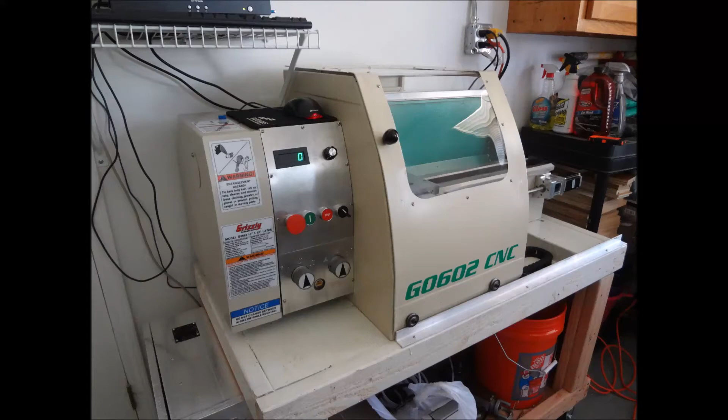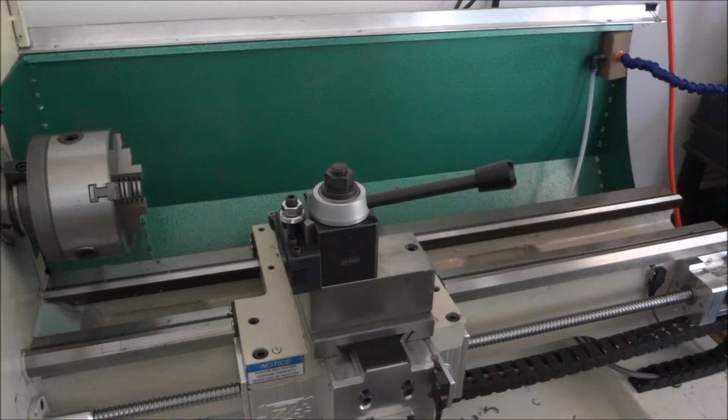Alright, so the next project I'd like to do for the G0602, after working with the quick change tool post, I decided that this handle's got to go. It doesn't feel good, it's got sharp edges, and it's plastic. So I thought, what better project to have for one of your first turnings on the G0602 CNC, but a nice knob for my quick change tool post. So let's go to Fusion 360 and draw this up.

Well, here we are in Fusion 360, and so I thought I would just kind of go over some of the features that it has. Let's just do the drawing for the quick change tool post knob. There are several ways that you can draw this out. You can use a sketch to create a circle like so. We want to use this plane here because this is my Z, the blue line, and this red line is my X. Right here, the spindle and the chuck, and over here would be the tailstock.

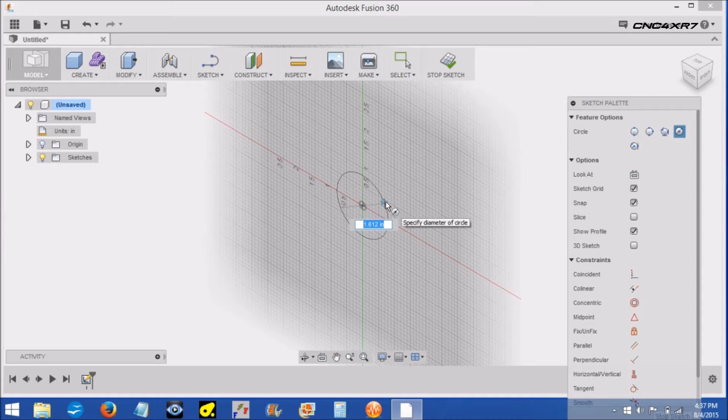So you start here and you can just click in the center, and our stock is 1.5 inches. So you type in 1.5, hit enter. It locks it in. Click the mouse and you're done. So we have our sketch of our circle. That's one way to do it. And then we can go to modify and we can pull this out 1.5 inches. Hit enter, and now we have our cylinder. Pretty straightforward.

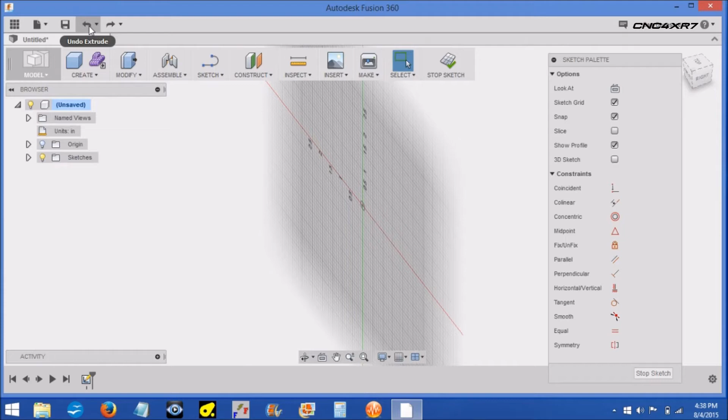Or undo this. Go back to the beginning. Another way is to go to create cylinder. Again, the blue line is our Z, and this plane right here being the spindle. Want to click on that. Type in 1.5 inches. Hit enter. Click the mouse. And then up here in this dialog box, I want to type in for the height 1.5. Hit enter, and I have a cylinder.

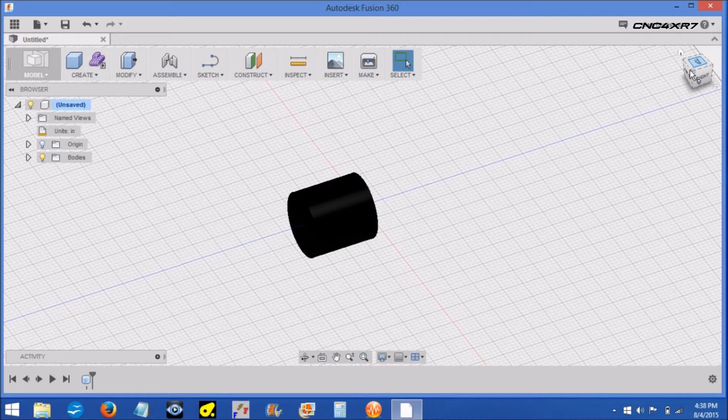I apologize for my display. For some reason my graphics card in this computer seems to have issues with 360, and it's very, very difficult to see. I can click on it and it turns it blue right here, but anytime I do anything, it changes it.

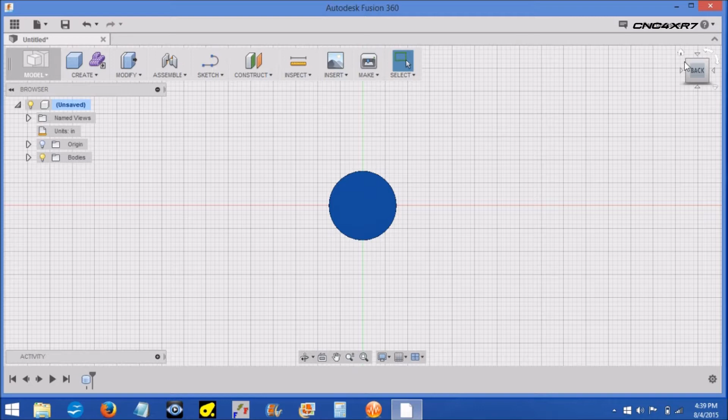So now one thing I want to point out is this little rotational cube up here. This thing is awesome. I'm used to using SketchUp, and this is a lot easier to manipulate your model and see where you're at. You can grab the center here and move it. You can just click on the center and it will give you the back of the model. You have these corners you can grab and rotate, and you have this home button which gives you an isometric view. Very, very cool feature. So this is the spindle side right here, which would be the back. So I'm going to click on that.

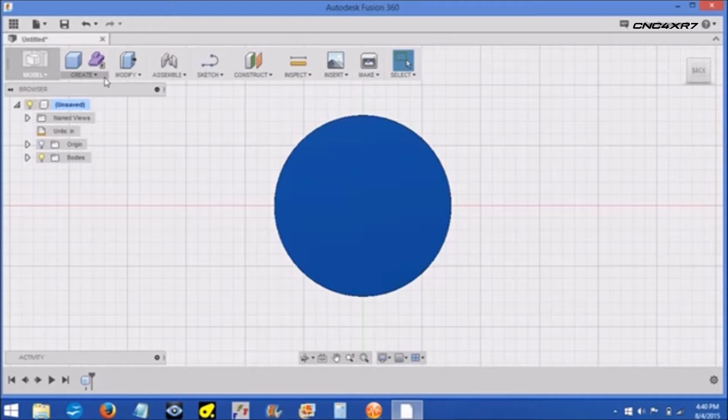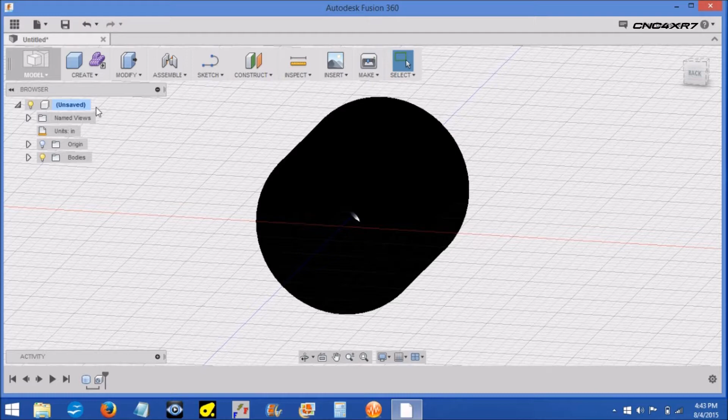Okay, so next we want to put our hole for our shaft to go into. So you go up to create hole, click on this point right there in the center. And we want it to be 0.875 deep. And we want it to be 0.3425 in diameter. And so we have a hole. Let me rotate it around so you can see the hole going through there.

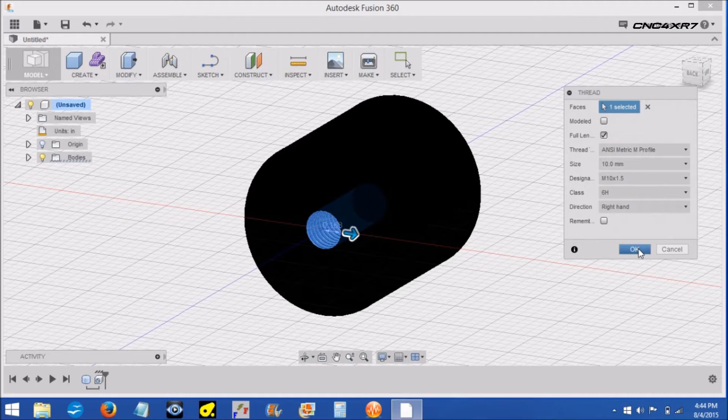Next we want to create some thread. So you click on thread. And we want to put it right here on this face. We want to use metric M profile thread. It automatically puts in a diameter based upon the diameter that your hole is. We want M10 by 1.5. Right hand threads. Click OK, and you can see we have our threads.

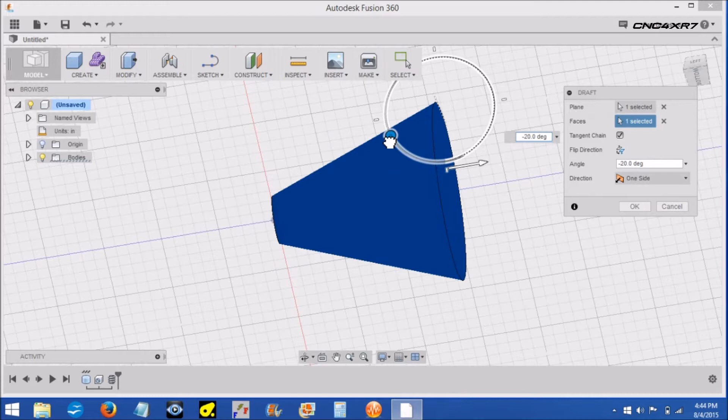Next we want to go to the front here, and we want to go to modify, draft. We want to select this plane and this face. And you can see it gives you a little thing here where you can move a knob to adjust. Let's see what 20 looks like. Okay, it might be a little too much. Let's go 15. You can move your manipulator, or you can just type it in. Negative 15 degrees. Select OK, and we have our taper. And then you want to go to modify, fillet, and we'll select this edge here to fillet.

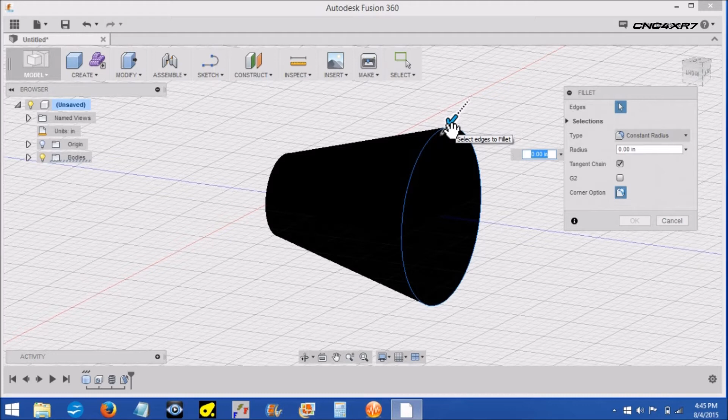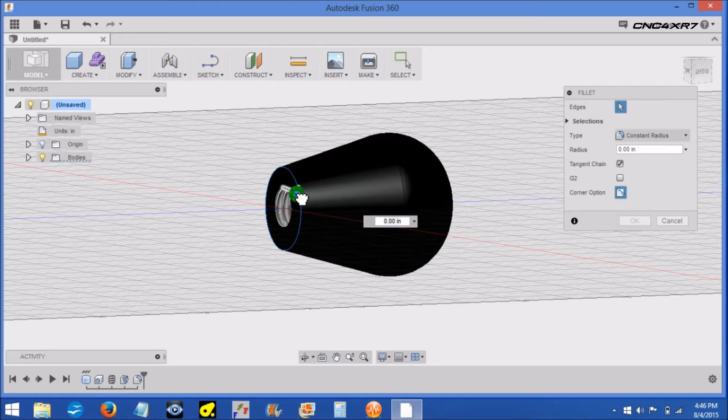And we want to go a ½ inch, so we can move our arrow down 0.5 like so. Click OK. Now we have it knobbed, and we want to do a little on the front edge as well. So you can go back up to modify and select it, or you can just right click and it says repeat fillet. It gives you the last thing you did. You can repeat it on this angle edge right here, and let's just do say 0.10 thousandths here, and there is a knob. Pretty straightforward and simple.

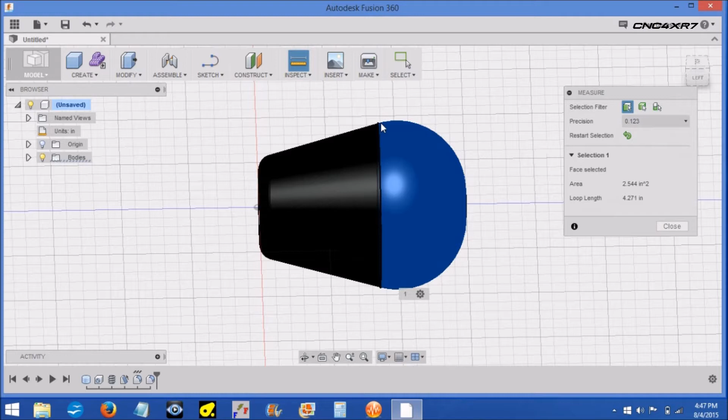Here's our chuck here, and this will be our knob. That's pretty much it. Now if you want to measure and see what the overall diameter is going to be, you can go to inspect, measure, and we can click on this right here, and it gives us, well, it's giving us the area. We don't really have a line here. Let's click here, here. Let's see if it gives us the diameter. Okay, 1.163 right here. So it's a little bit bigger here, maybe 1.25 inches. That's good.

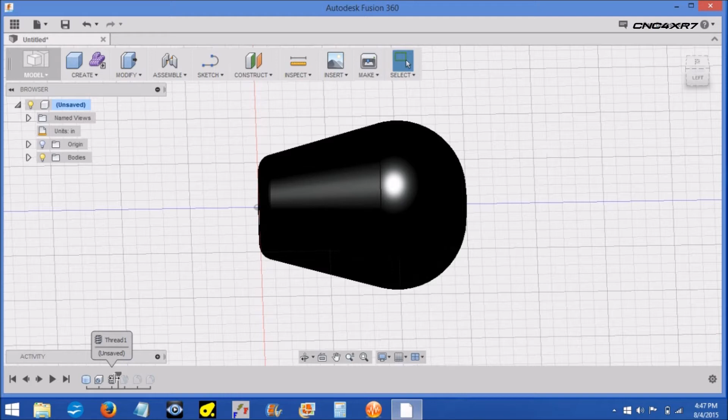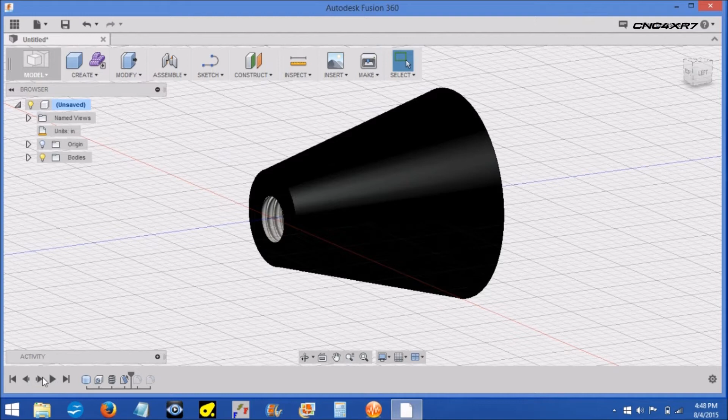So now we just need to do the cam process. One thing I wanted to point out is down here it gives you this timeline, which is really cool because you can take this and move it all the way to the beginning. You have nothing, and you can see what you drew, how you did it, and if there's any problems you can kind of see maybe what happened. So we put our hole in there, then we threaded it and put our taper on there, rounded off the back, and then rounded off the front end.

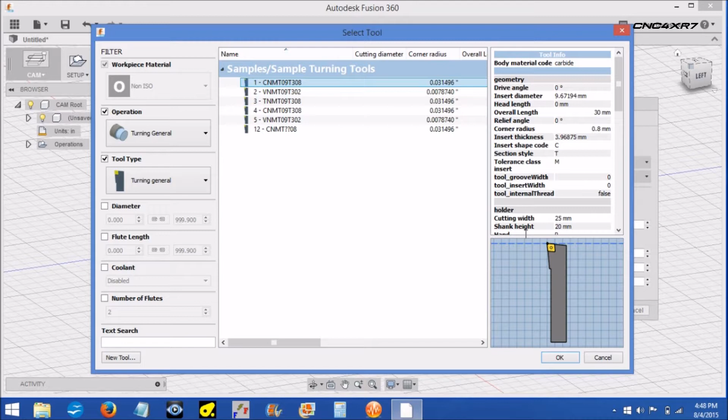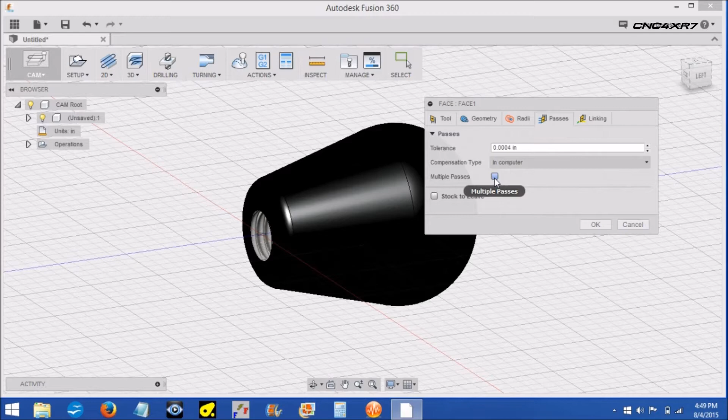Pretty neat. Alright, so to do our cam processes, you go to Model, Cam, Turning. We can face the part if we need to. And then let's do 4 inches a minute. We're going to be using flood. Let's select our tool. Just our standard, this is my standard master tool here for facing. Click OK. And we'll leave all the other stuff. We want it to go, not to go home, so we can click that. Or you can tell it to go home at the beginning. And we don't want to do multiple passes on the facing operation, so we'll click OK.

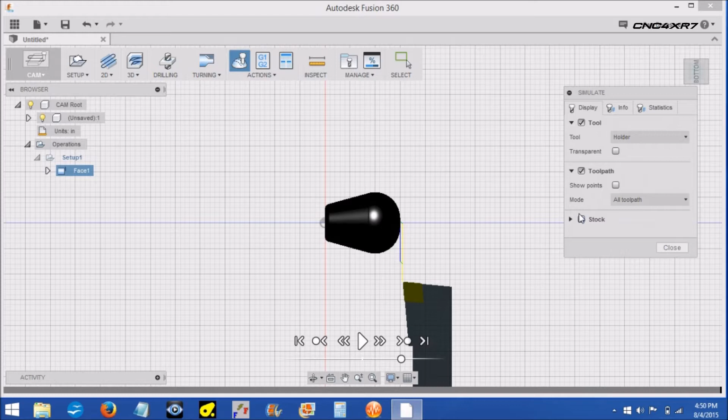So you can see it generates the cam operation here. And pretty straightforward. We can go up to Simulate and play. Let's click on stock so you can see the stock. We can play, and then you can see it does our facing operation. In setup here, we need to edit our stock if we need to. It already puts in default by the choice of the model, so that looks pretty good.

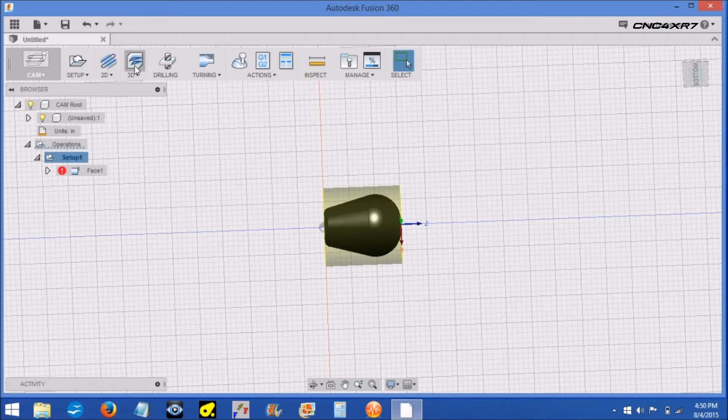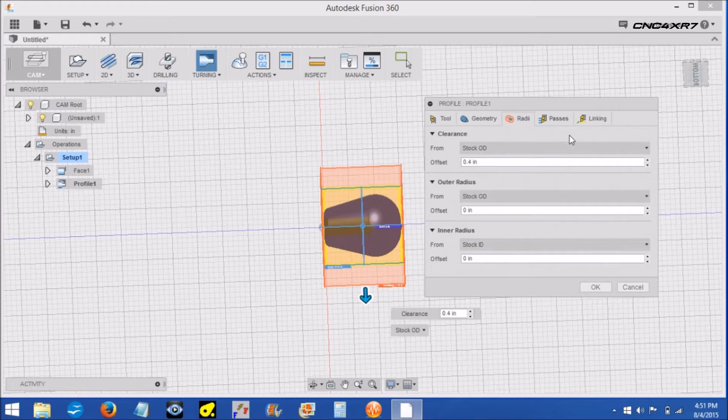Our next operation is turning. Let's do turning profile. This profile is left to right or down the Z-axis. Select our tool. Because this has the radius at the front and the back, let's select our number 2. And you can see the clearance here. And then we want to finish pass and roughing step down. Let's try 0.01 and 0.01 for our step over for our finishing pass. We'll leave those empty. Maybe for the finishing pass we should change it to 0.005. Okay.

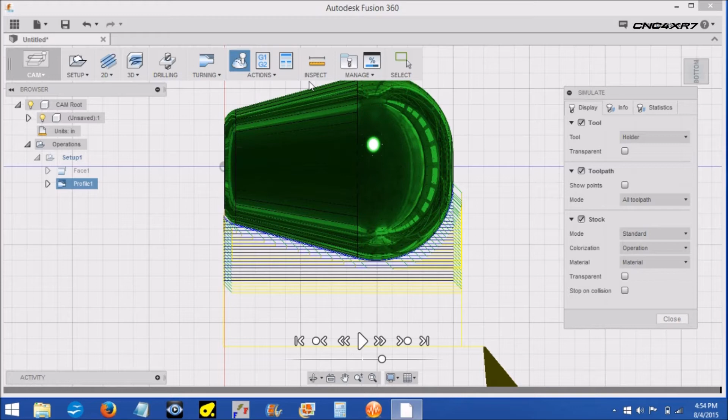Alright, click OK. It does its calculations. You can see the toolpath here. We can go to Simulate, and it's taking really light passes. The visual aspect of Fusion 360 is really cool. Okay, so if you want to make any changes, you can go back and make whatever changes you want. Just right click on it, edit, and then go through. Let's change roughing here. Let's change it to 0.02 thousandths.

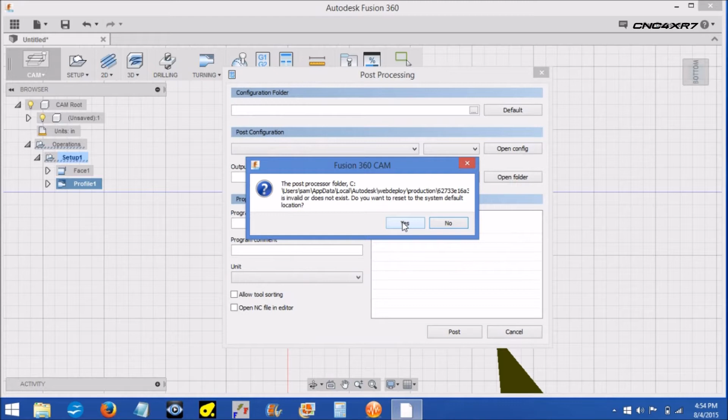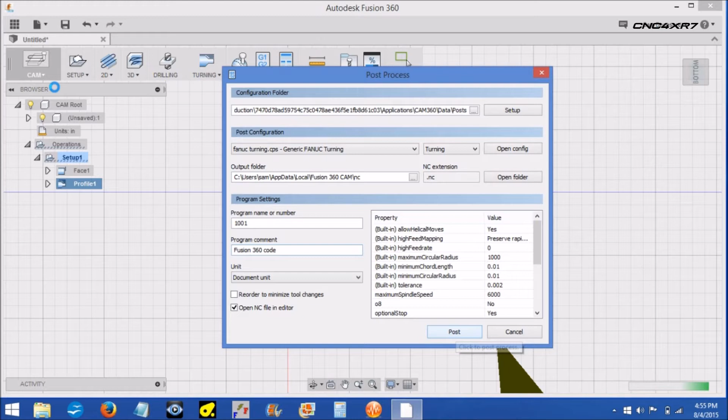And post-processing. Now 360 doesn't have a post-processor for Mach 3, so they suggest that you use this generic FANUC post-processor. Let's see, you can go to turning here, and then it only gives you the turning profiles. See the choices, there are only 4, but click this generic FANUC turning, and that seems to be working okay. And then we'll click post, and we'll name it quick change tool post now. Click Save.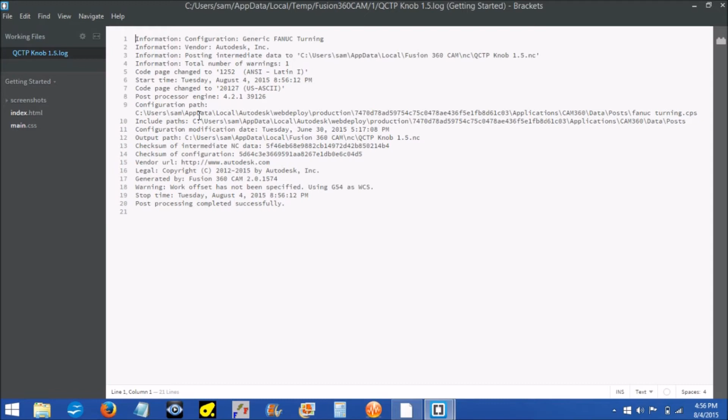And it takes a few minutes for it to process. But it gives you two sheets. It gives you a setup sheet and it gives you the actual code. The setup sheet here, it gives you all the information about the process that was posted. Here's the G code posted. This one looks like it's 328 lines.

And that was just this one operation. I didn't post the complete code. It was just the profile that we did that was posted. If you want to post the whole process, then you have to click on Setup and post from there, and it'll get every operation below there and include it in the G code.

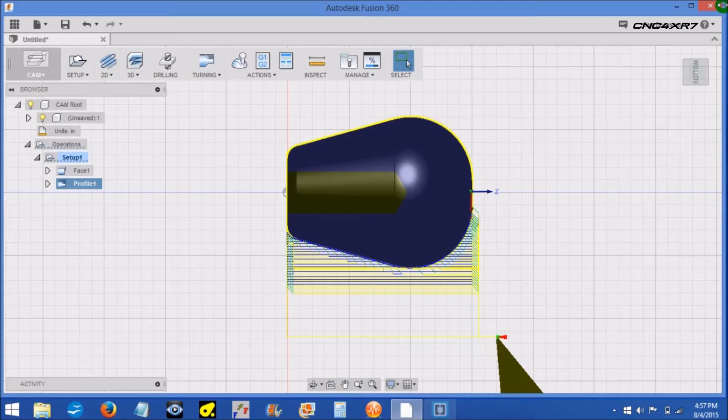The tool change is a little different here than I'm used to. It's a T0202, tool number and then the tool number offset, so that's a little different. But to get the whole process, you see, you can just click on Setup. So that wraps up the drawing. Let's go out and get this thing turned. I think it turned out pretty good. Let's see how it turns out on the G0602.

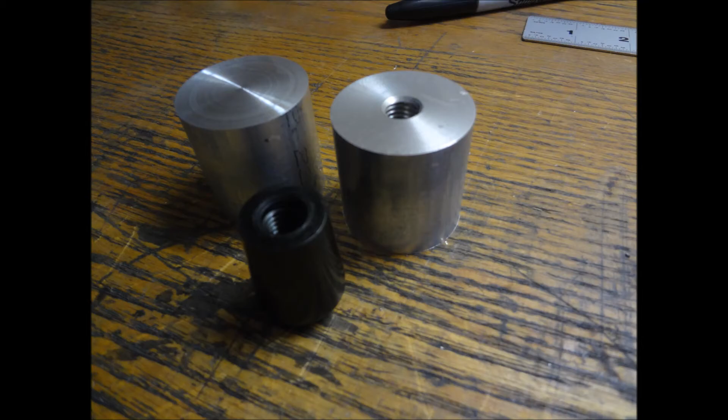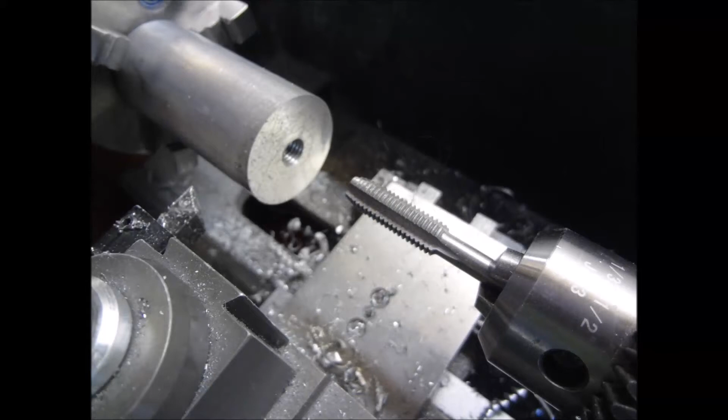Okay, so this is the stock I'm going to use for the quick change tool post knob, and I just turned these out of some 1.5 inch aluminum bar. I cleaned up the faces a little bit. I didn't clean it up all the way because most of that's going to get turned off. I just cleaned it up a little, and then I center drilled it, bored it, and tapped it. This is M10 by 1.5.

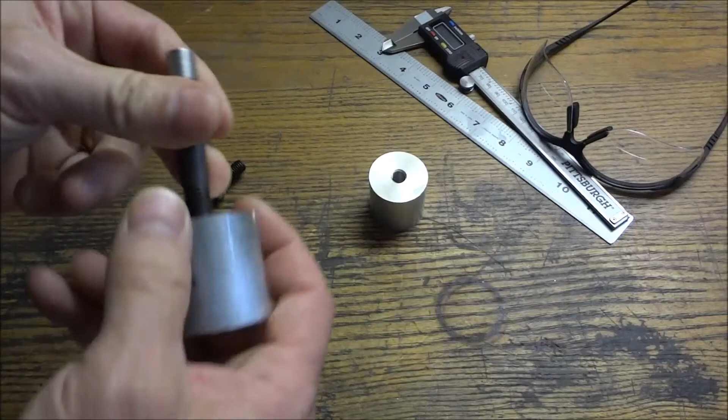All I did was I just took a bolt and turned down the head, and I'm going to use it as my shaft. That way everything will be symmetrical off of the thread. I made two because, hey, you never know. First time with the CNC lathe, so we'll see how it goes. Alright, so let's get this chucked up. Let's get it turned.

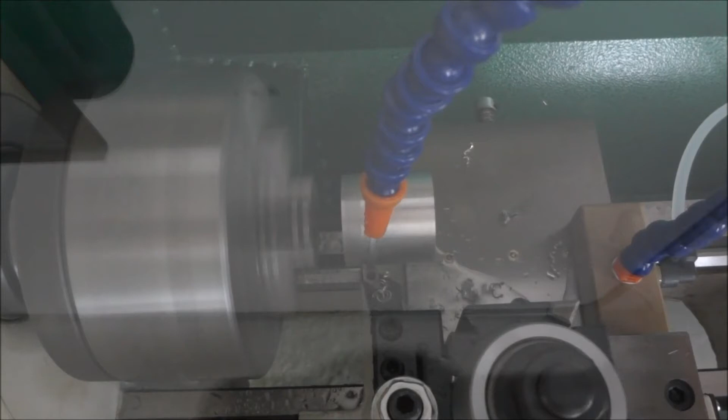Taking very light passes because I'm not real sure. Feed rate is 15 inches per minute, and I believe this is 0.005 depth of cut. Chip breaker, I can tell you that.

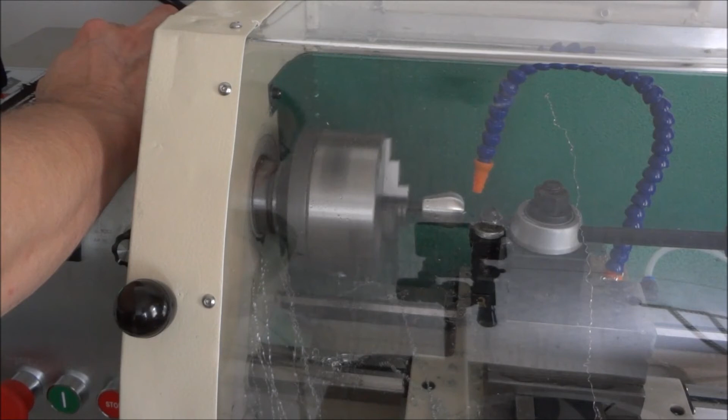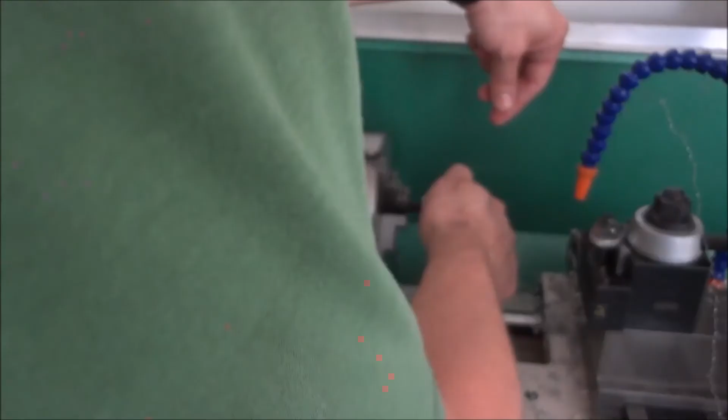It's not as smooth as I thought it would be, but it's definitely in the shape that I want. But I can feel ridges, and I'm sure it's this tool. This may be not the best tool for this particular job. I'm going to have to do some work with that.

One thing I did notice is just when you thought you got all the leaks, nope. This all looks good here, but I don't have any wetness anywhere in here. So I think these plates are all holding. I think my little milk jug trick is working, but I noticed that while I was running this code, the floor is all wet. So I've got to clean that up.

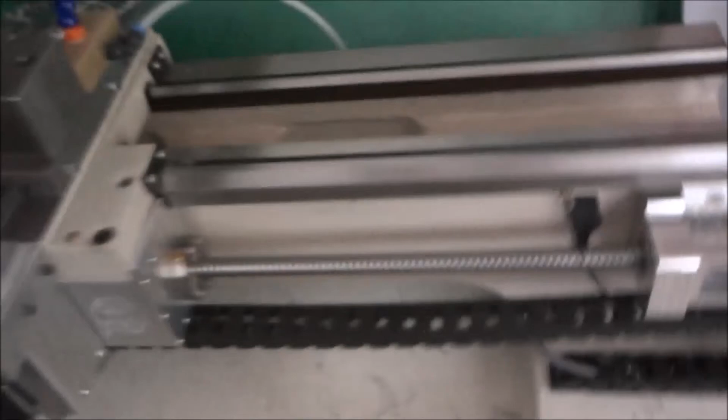And I believe we have water here. Now how we get coolant from there to here, I'm not real sure, but I think it's somehow running down this rail, because it's all dripping down right here. So I'm gonna have to do some investigation and see if I can figure that out.

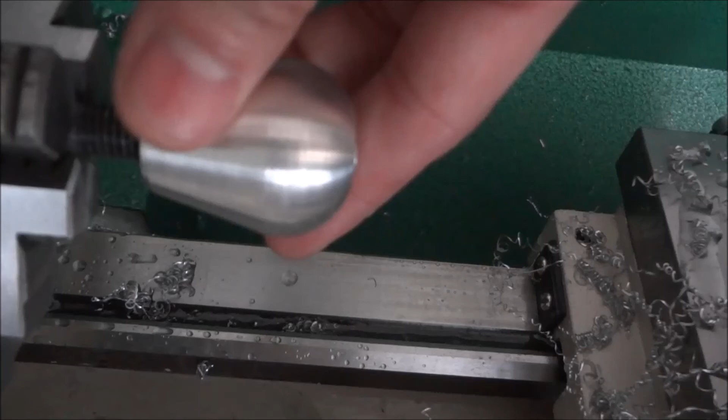But yeah, I've got to work on this a little bit and see what the deal is with this tool. I don't know if I have my feed. Maybe my feed is too much. So I'm going to slow down the feed and try it again and see what we got. I don't really mind it not being too smooth, but I'm going to try to get it all smoothed off real nice. Not too bad for the first cut.

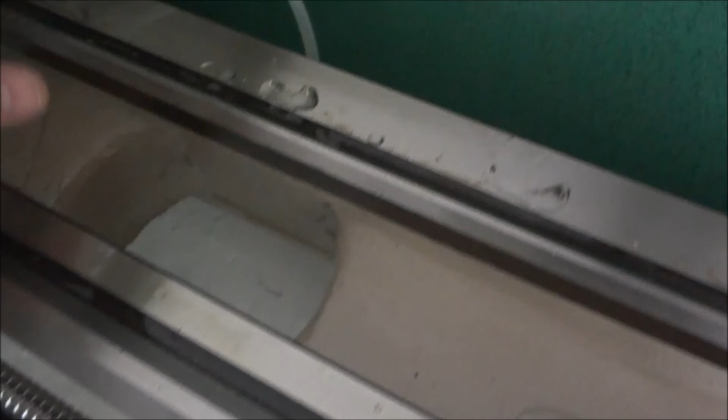More importantly though, I need to try to figure out the leak situation. Can't have half your coolant going on the floor. So anyways, yeah, I'm not real sure how it's getting over here. It might be running down the bed. I see here. Okay, it's running down the bed. So I need to put something to keep it from running down the bed. Okay, that makes sense. I can fix that. Alright, I'll shoot a video and show you what I come up with for the fix for that.

G0602, first turn with Fusion 360. Not perfect, but not bad. I'm gonna try maybe a different tool. I definitely need a chip breaker for this. When you're turning this aluminum, you get these long strands.